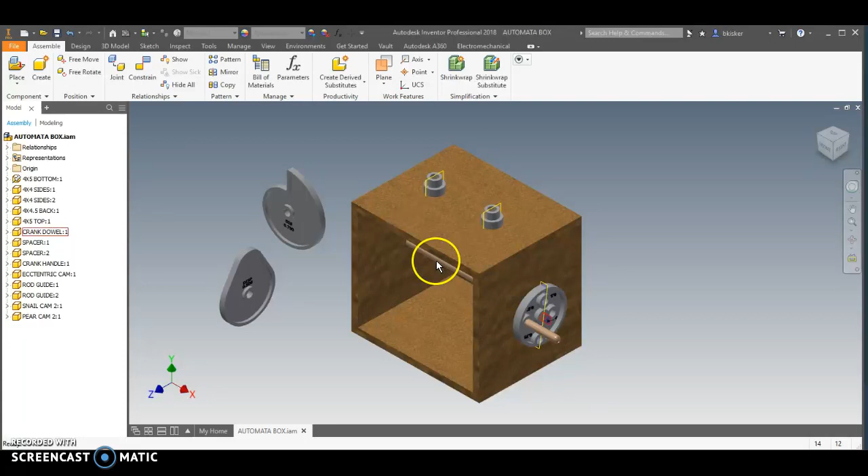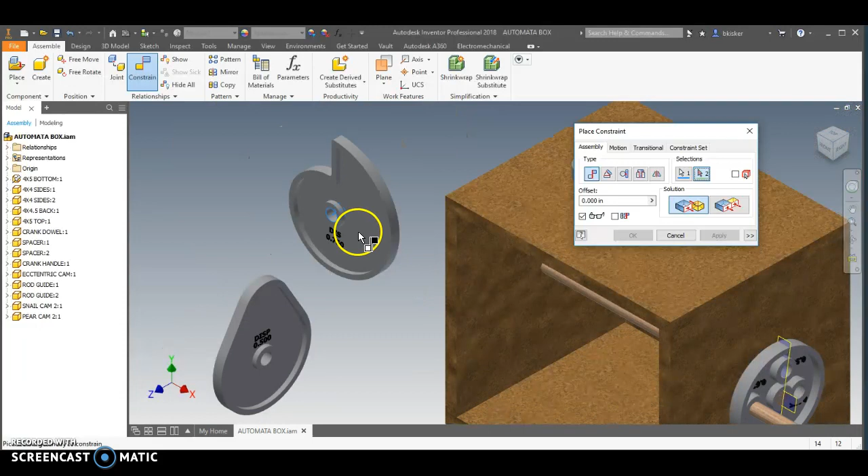I want to have a snail cam here and a pear cam, and I want those things to be on this axle in the middle. Not only that, but I want them to be aligned vertically with these rod guides so that they're vertically aligned underneath them. Really simple to start off with. I'm going to start with just a simple mate, and I'm going to make sure that I choose again the work axis, not the circle, but the work axis that goes through the middle. I'm going to choose the work axis that cuts through here. I'm going to mate them together. That looks great. I'm going to click apply.

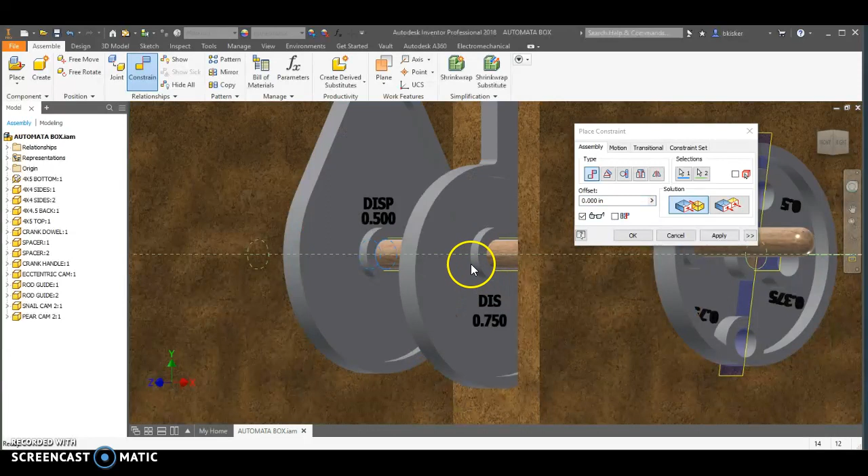I'm going to do the same thing here for this pear cam. So there, axis, and there we go, right there. Okay, so now if I come over here, I have both of those things in place. I'm going to click OK and just show you what it looks like here. So from the front view, they're locked in, but they can slide left and right. So my next goal is to get these exactly underneath the rod guides. That's the next step.

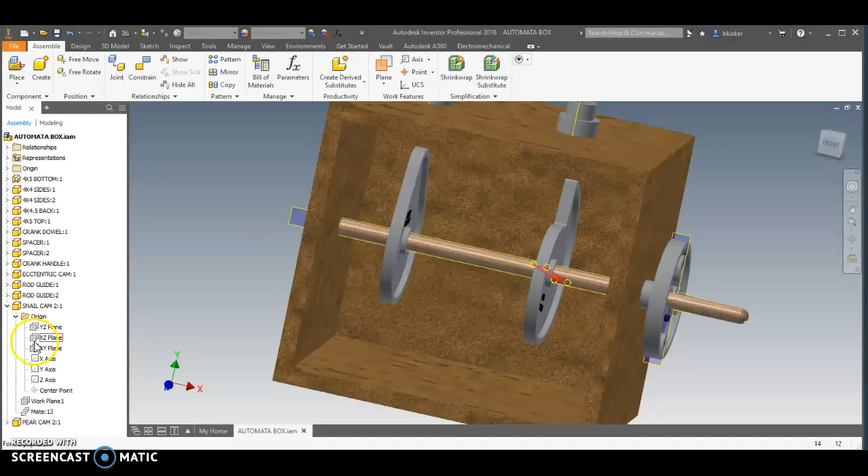Now, here's what I would suggest to you. Number one, if you're good, you would have built these things so that there was a mid-plane extrusion, but I did not do that. Okay, so I'll show you the workaround. That's probably what you're going to have to do if you've already created the cams. Inside the snail cam, notice that it has an origin folder. If I highlight it, I can look at the different work planes that exist. The problem is that work plane is on the edge and not in the middle. So what I did was I opened up the cam and I created a mid plane down the middle, okay?

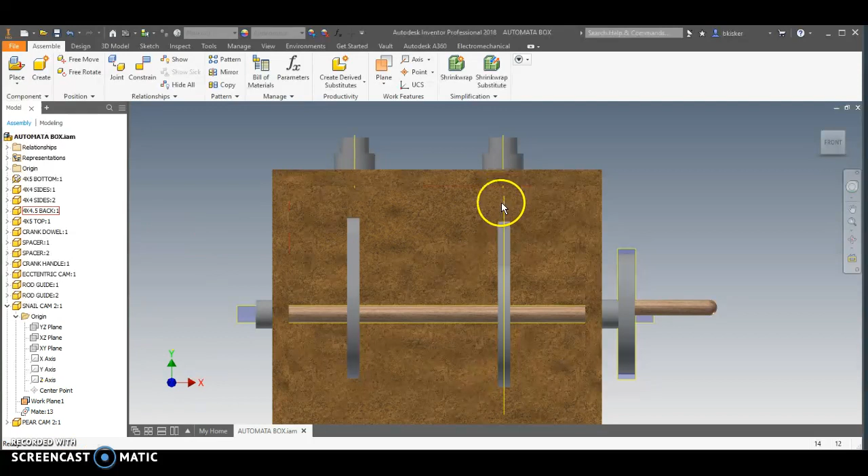The mid plane can be created if you choose plane. This is an assembly file, but if I do it in the part file, I click on plane and then I click on the left side and the right side, and it knows to go halfway between them. So now I have a work plane in the middle. I'm going to take that and make it visible. So now you can see that I have a work plane cutting through the middle of that snail cam. Let's get a better view right there.

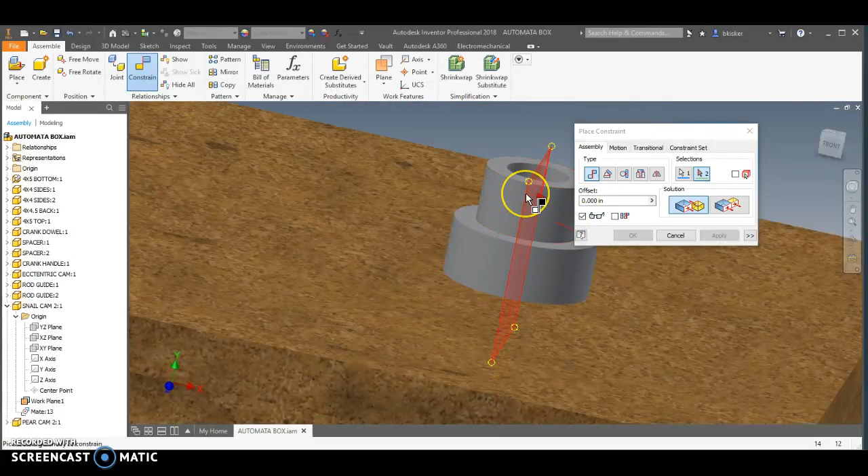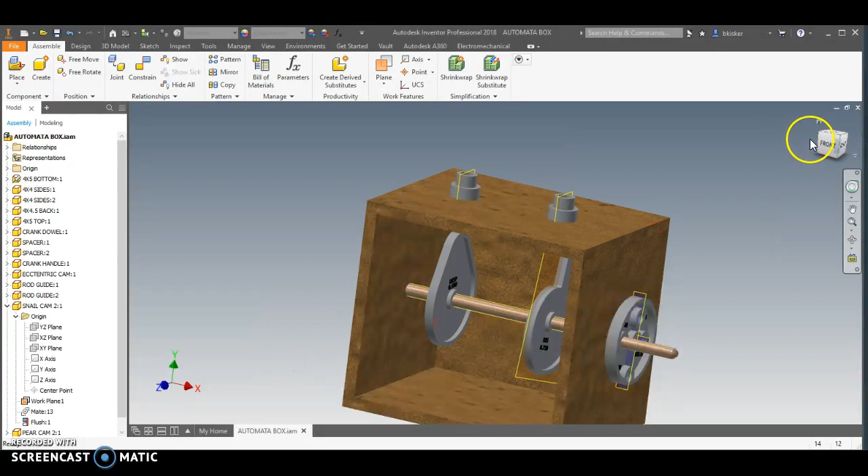Okay, so when I have that, then I can do a mate or a flush. Notice the arrow there points to the right. I come up here to the work plane on this guy. It also points to the right, which tells me I need a flush. I'll know for sure because if I choose the wrong direction, it's going to just flip my snail cam backwards. I have all the text on here on purpose. I want those things to face this direction. So good, I'm going to click OK. And notice what I have here now. The snail cam cannot move anymore. It can still rotate, but it can't move left or right.

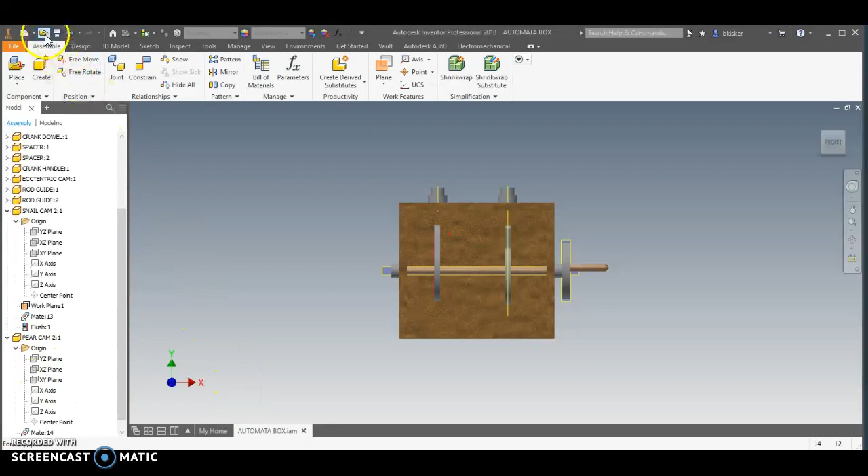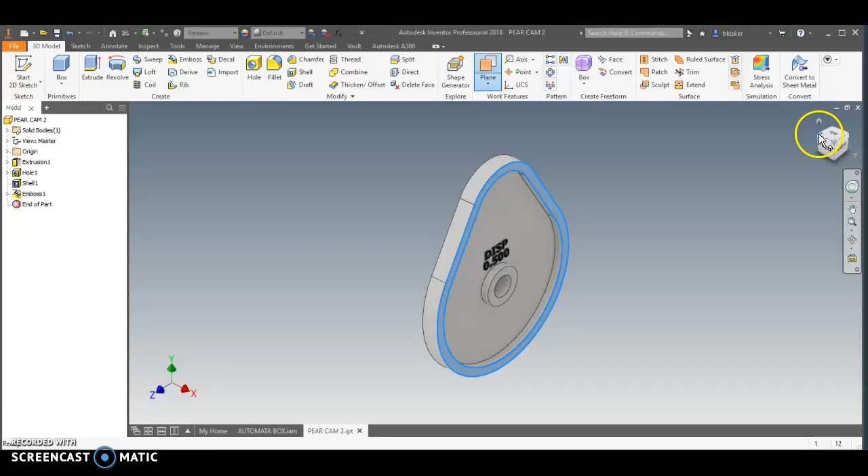I'm just going to repeat that process with the pear cam. I look at the origin folder and I go, oh man, no planes here that I can use. So again, this is an easy way. I'm going to click open, find my pear cam, and I'll demonstrate that work plane. So I click plane. You can drop down, by the way, and choose it here, but it's smart enough to understand if I click the back side first and the front side next. So here's one side. Come around here, click the other side. It says, I'm guessing you wanted one right down the middle. There we go. I'm going to save this.

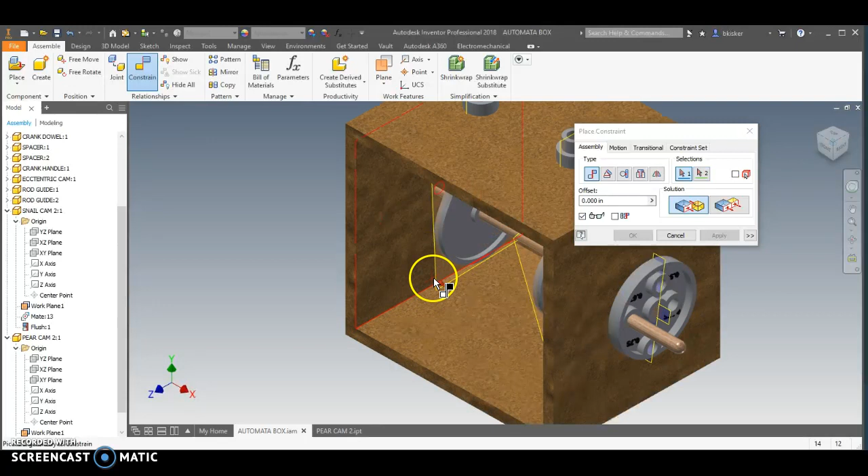Notice it's visible here. And when we go back to the assembly, aha, there's one cutting right down the middle of my pear cam. So same step. Get where I can see it a little bit better. Choose the work plane. And I'm going to choose this work plane. And I want to do a flush instead. You'll see it flip around. There we go. Flush instead. I click apply. Click cancel. And we're good.

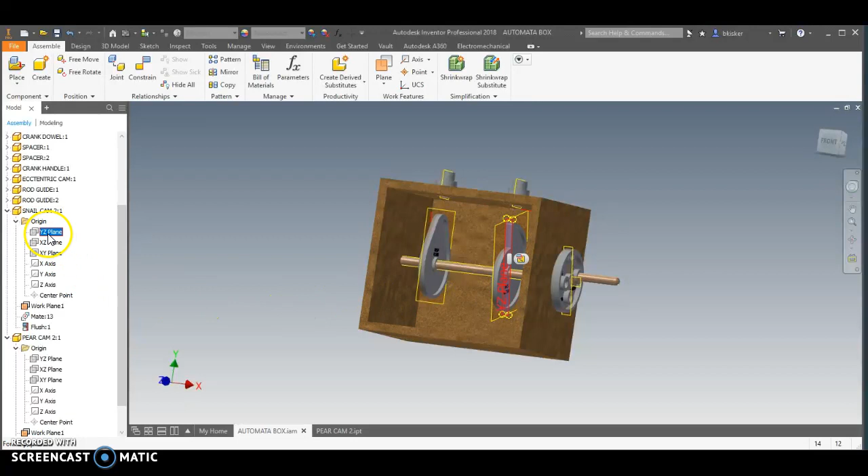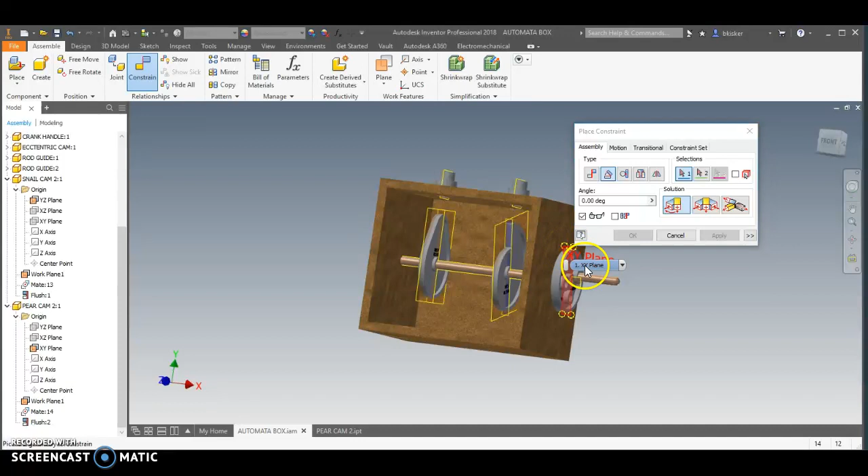Now, the problem is this. I can turn the crank and the axle turns, but the cams don't turn with it. Shoot. Well, here's what I'm going to do then. Back in here, I have a work plane that cuts right through the middle of my snail cam. I'm going to make that visible. I have the same thing for my pear cam right here. I'm going to make it visible. And I'm going to lock those with an angle constraint, directed angle, to the work plane on my eccentric cam. Or I can do it on the axle. It really doesn't matter. Let's just do it on the axle right here. When it moves, I want this to move as well.

Apply. Click again. This work plane to the axle. Okay, and right now you can see it flipped it upside down. So this would be an alignment issue. Do I want it to be like this? Perhaps I want it at a different angle. Maybe 90 degrees at all times. Maybe 180 at all times. You can decide this. This is part of the story you're getting ready to tell. But changing the angle constraint is what's going to change the alignment. I'm going to click OK.

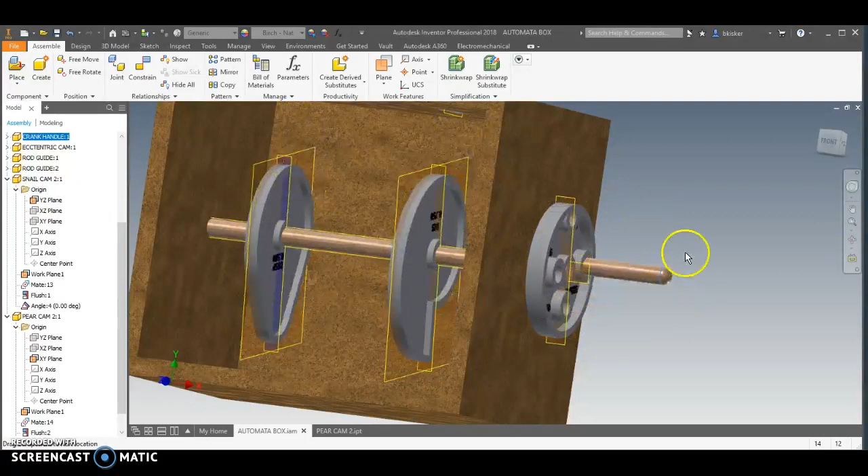So I'm done with this. And now notice what happens when I turn the crank. Aha, they all spin together. That is pretty sweet. So hopefully that helps. We're getting pretty darn close to having everything done. A couple more videos and we should be good with the automata.